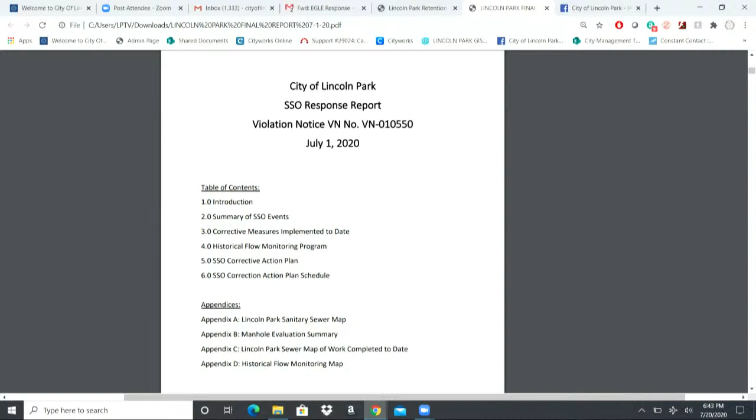Going through the report quickly, there are 6 components to the table of contents: an introduction providing an overview of historic work done to date, a summary of SSO (Sanitary Sewer Overflow) events, identification of physical corrective measures done to date, a historical flow monitoring program, an SSO corrective action plan, and an SSO corrective action plan schedule. The report is fairly detailed and technical.

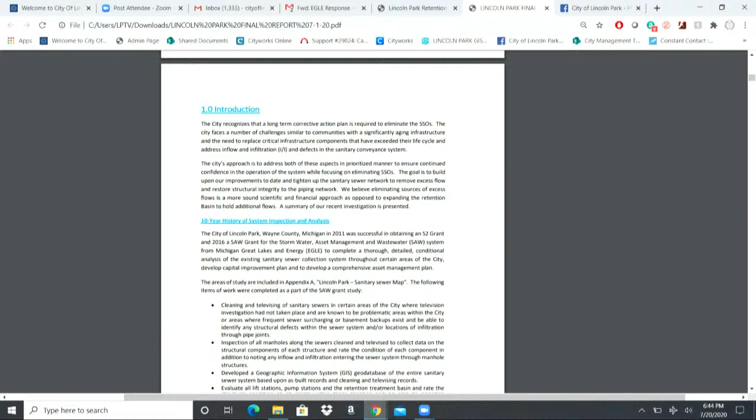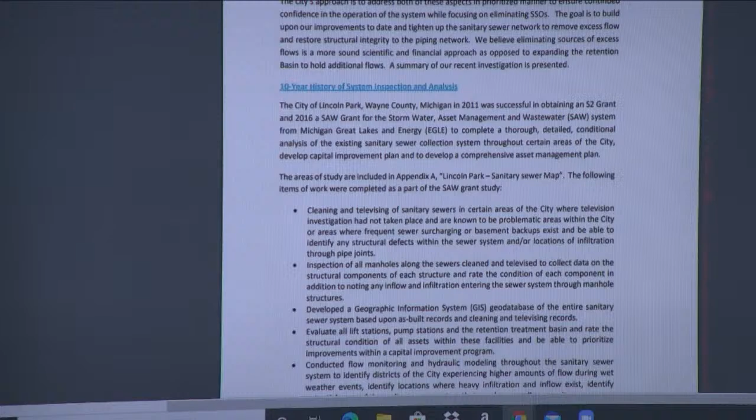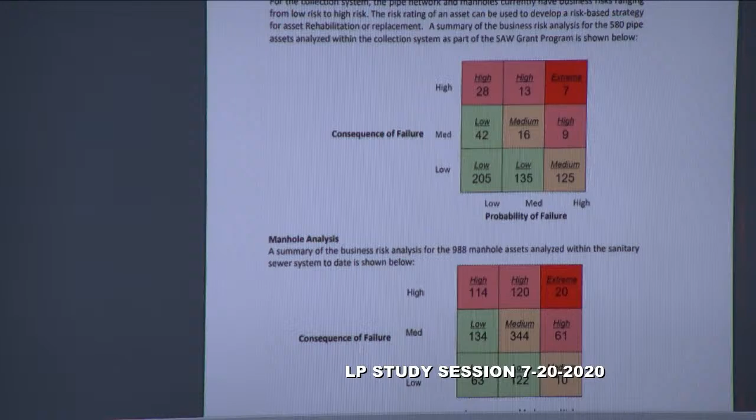The very first introduction is just an overview. One thing I'd like to point out is on page 4 of the report, where we did an assessment of the criticality of our assets. That means looking at the probability of failure score multiplied by the consequence of failure, so you can look at all of your assets present.

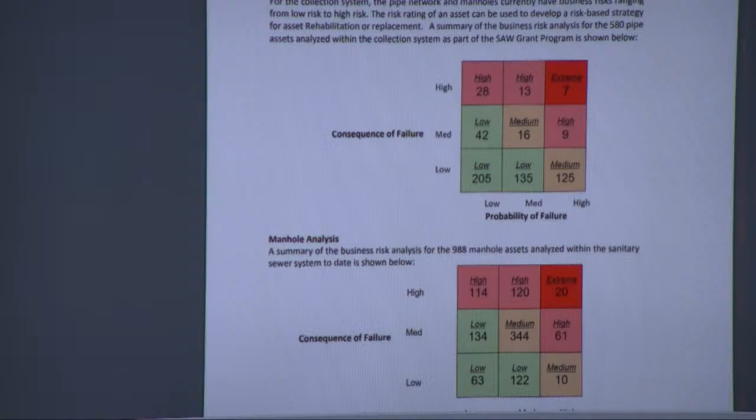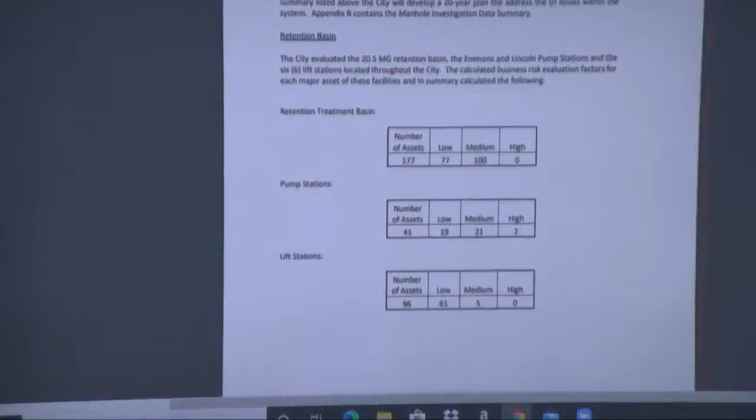An asset is something like the Emmons pump station, the retention basin, or the Lincoln pump station, and similar things. On page 5, you can see the number of assets within the retention basins - 177 were evaluated: 77 at low, 100 at medium, and 0 at high. That demonstrates all the work we've done.

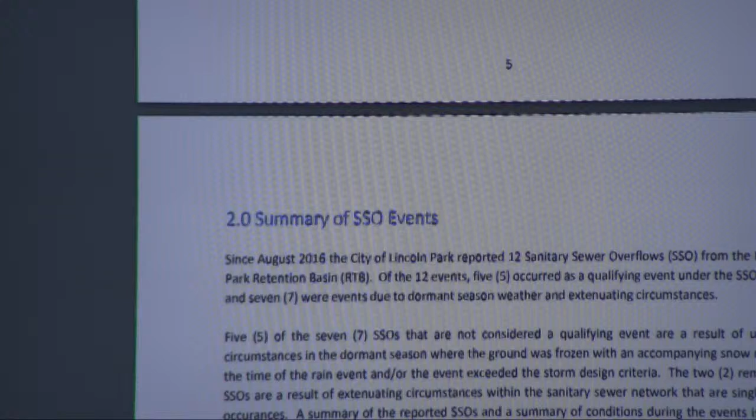All the detail for that information is within our SAW grant submittal, which we've already submitted to the agency. That provides an overview showing we have a very good idea of our needs. I'll go through this in the corrective action plan and circle back to what assets have to be addressed within the first phase, 0 to 5 years from now.

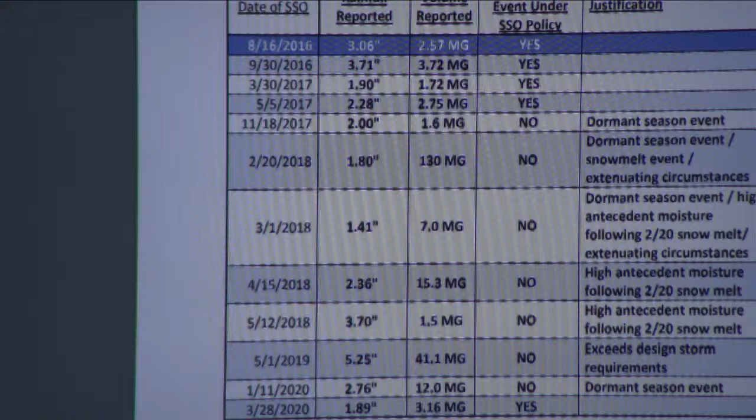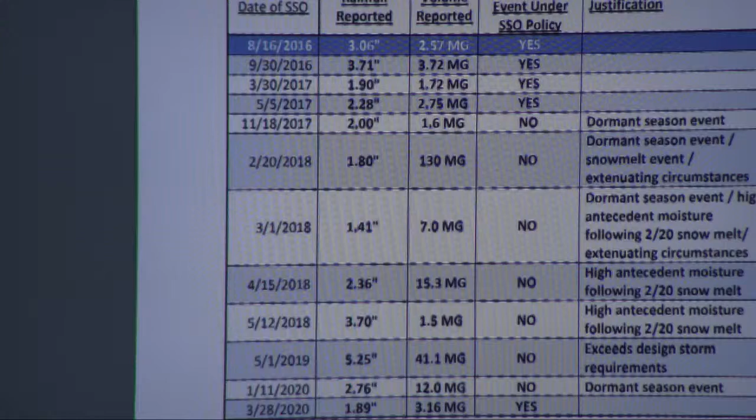The second portion of the report is a summary of the SSO events. We identified 7 SSO events that we don't feel qualify as a true SSO under the state agency's mandate - those could happen during a snow melt, off-season from the summer events, and things like that. Whether the agency will agree with us, I don't know, but we mentioned it in our conference call with them prior to submitting the report, and they realized there is some justification to that.

I'll identify 2 substantial events we had. One was on February 20th, 2018, where 130 million gallons was discharged. There were extenuating circumstances - we had a sewer break under the Ecorse Creek, and the Ecorse Creek was essentially free flowing into our system, then going to the pump station and then to the retention basin. The retention basin holds 20 million gallons, which isn't a lot compared to the volume of the Ecorse Creek, to be candid. That's why our discharge was so large at 130 million gallons.

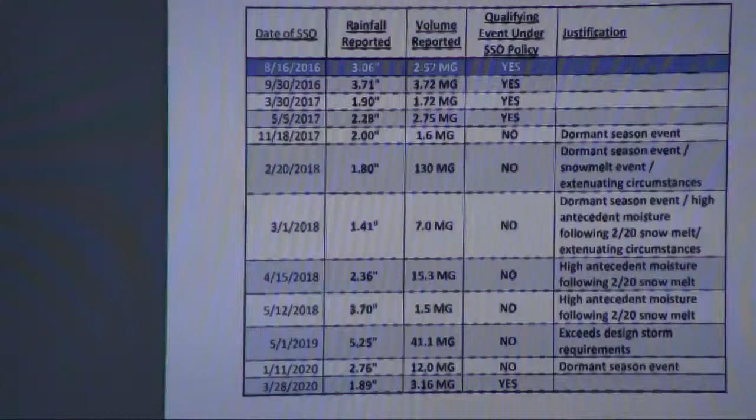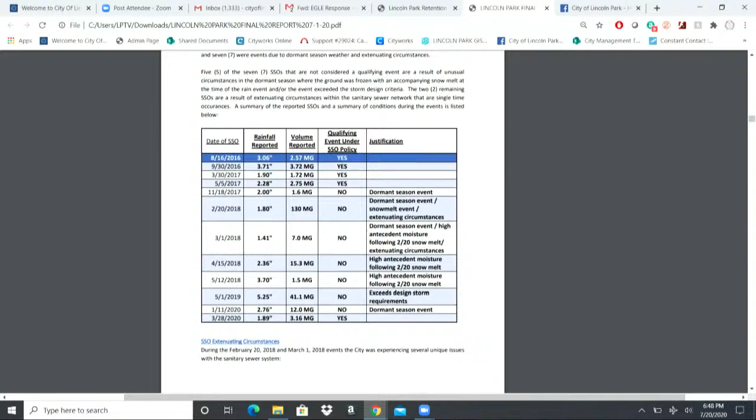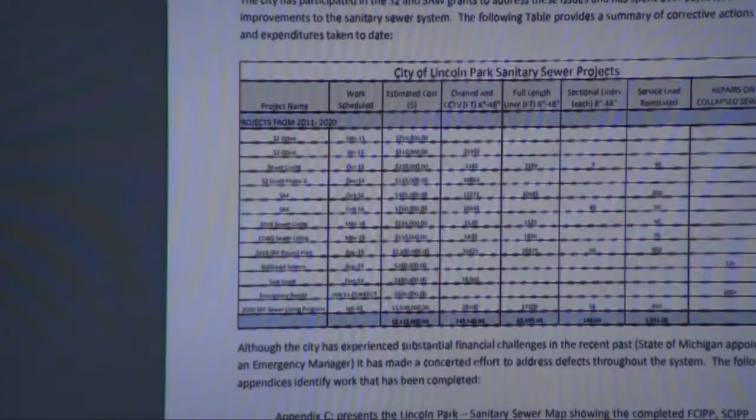The second extenuating circumstance was on 3/1/2018, when our discharge point was blocked. We were having high water with very late rain events, high water in our pump station. We realized something was wrong, and we couldn't unblock the outlet, the restrictor, until the flows had subsided. Those are 2 of the 7 events that demonstrate that every once in a while things can happen resulting in SSOs, and the agency, EGLE, is well aware of that.

The next thing we talk about is corrective actions implemented to date, on page 8. It identifies all the work that's been done since 2011. We've spent approximately $8.1 million on there.

We've cleaned and televised approximately 250,000 feet of our sanitary sewer system. Full-length liners, we've done approximately 60,000 feet, and sectional liners, approximately 188.

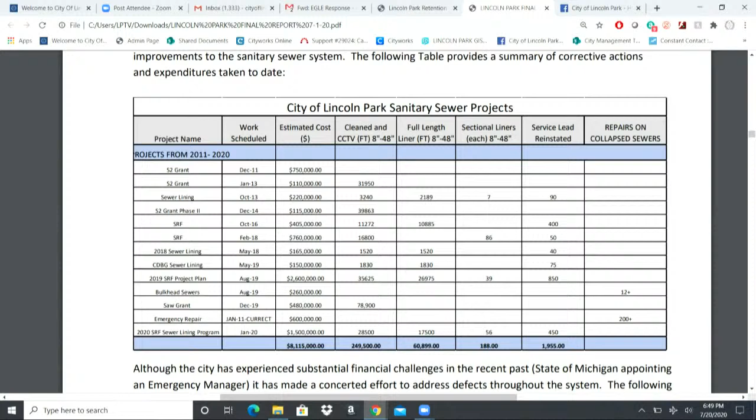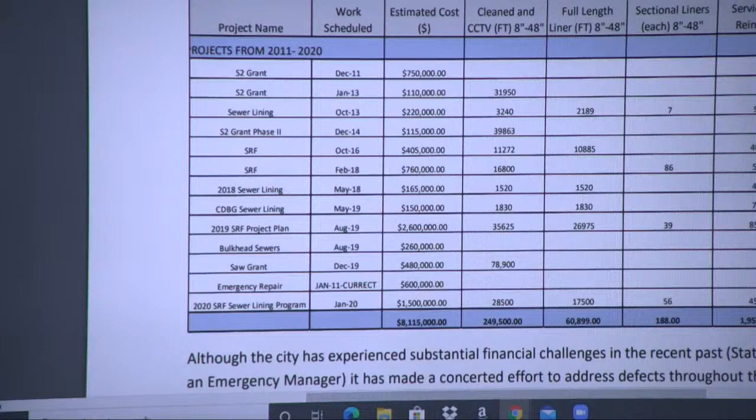You can see the difference between the full-length liner and the sectional liner. Lots of times, because of the age of our system, we're having to do full-length liners as opposed to sectional liners. Sectional liners are pinpoint areas that can be addressed through non-intrusive means, but our system is at an age where we have a lot of structural concerns that require the full-length liner.

You can see that we have certainly made quite an effort as a community to not only look at the problems facing the sanitary sewer system, but we've addressed them too. And I think EGLE is well aware of that.

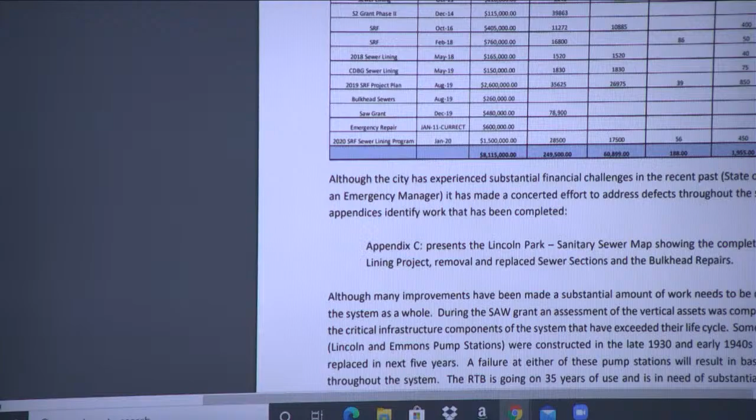I think the fact that they have not issued this letter earlier is a testimony to that, since they go back from 2016 to 2020. So they've been a good partner of ours in this approach, hand in hand on things we've presented to them on how we're going to address things. Because we've been very diligent and very proactive, they have kind of taken a soft approach to it and issued the letter when they really had no other alternative.

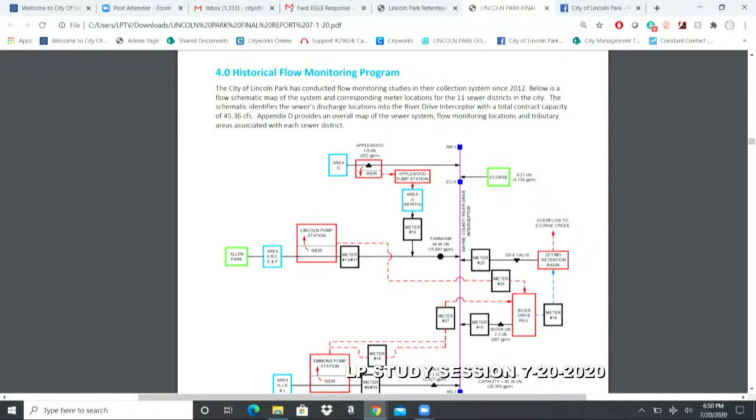But next is the historical flow monitoring program, on page 9 of the report, and that provides just a schematic overview of how the system really works. I know it's a bit confusing, but it basically shows that we have a number of discharge points.

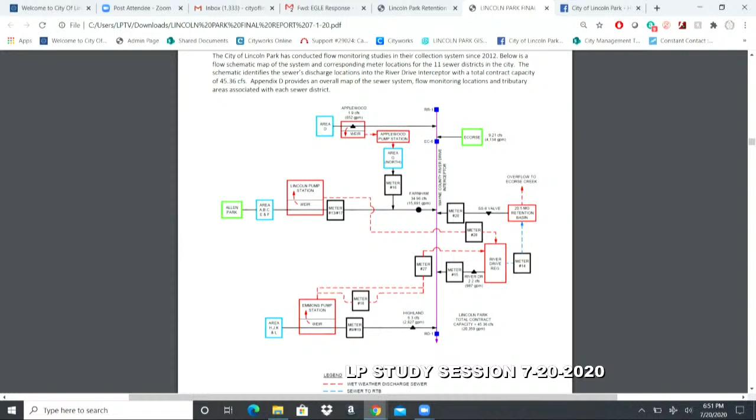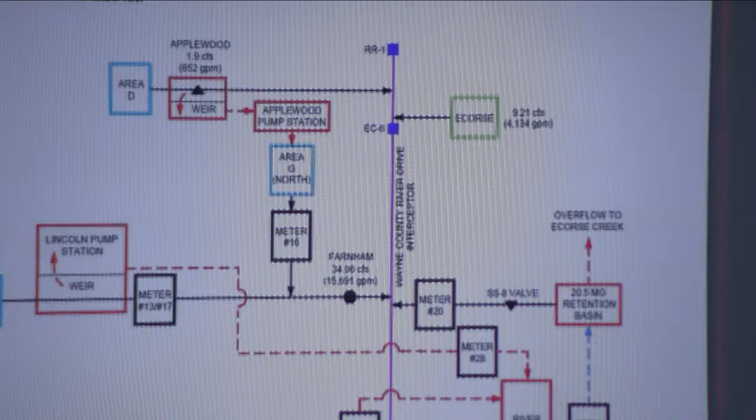Where the retention basin comes into play is with the Emmons pump station and the Lincoln pump station, and you can see we identify a weir. A weir is a flow wall, so what that is, water gets up to a certain point, and if it doesn't crest the wall, no water will go to the retention basin. Once it crests the wall, then it does go to the retention basin.

When it's stored in the retention basin, we have an outlet into the River Drive interceptor, and we're allowed to discharge our basin when the plant is able to take the flows.

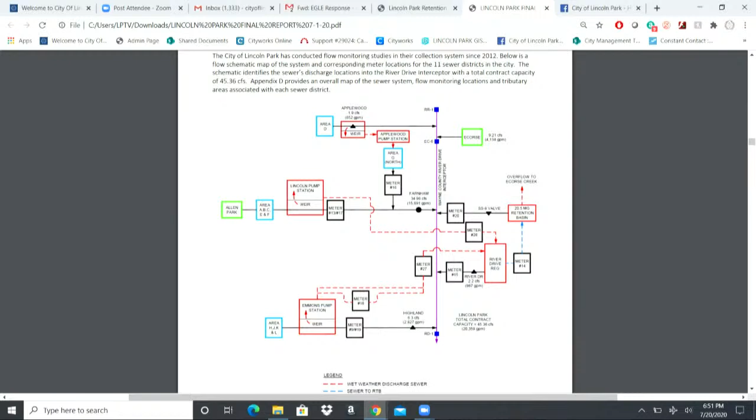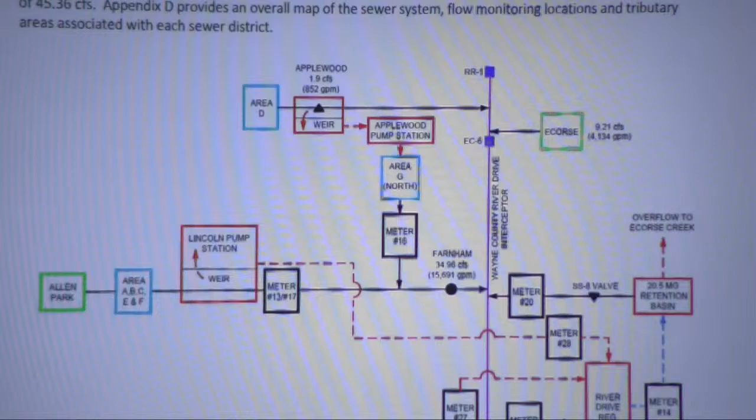So we can run into situations where we cannot discharge the basin and another rain event happens, and we end up with an SSO. We're storing from the first event, a second event happens, and we can't release our flows into the River Drive interceptor because the sanitary sewer system or the DUWA treatment facility can't accept them at that time. So there's a lot of things involved with the SSO.

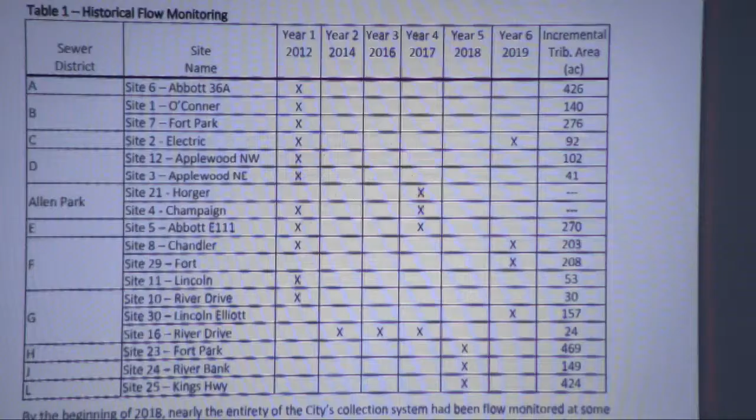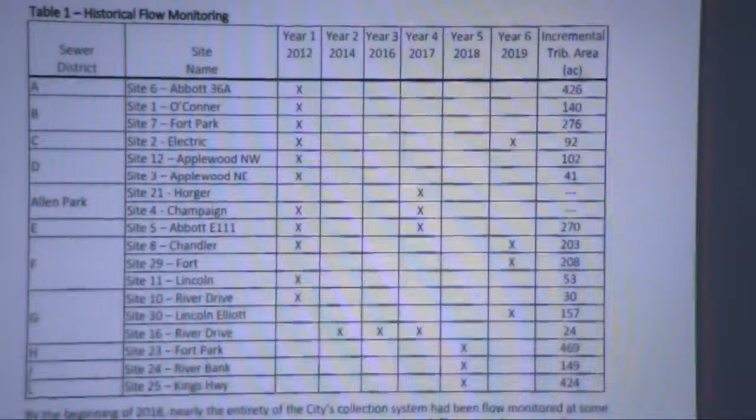The next page, page 10, provides the sewer districts within the community, and these are in the appendices that I can address with the public later, or we can go over a little bit later. We have sewer districts basically A through L, and we look at the ones we've monitored. A few of them we've monitored multiple times with flows just to see if we can figure out exactly where maybe some of these excess flows are coming from within the community.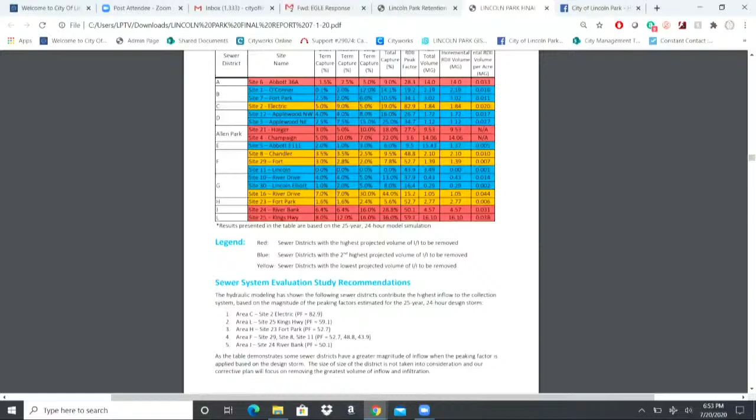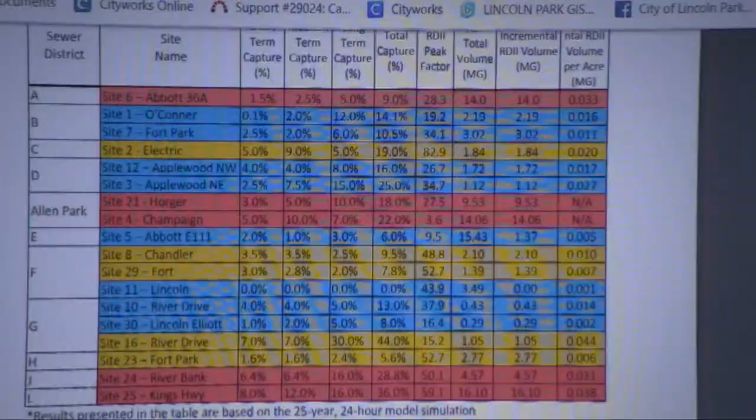Now, this is on page 11, an important page that I want to focus on. Based on the flow monitoring we've done since 2011 to 2020, we have broken all of the sewer districts into 3 categories: red, blue, and yellow. Red being districts that have the highest I&I that were present.

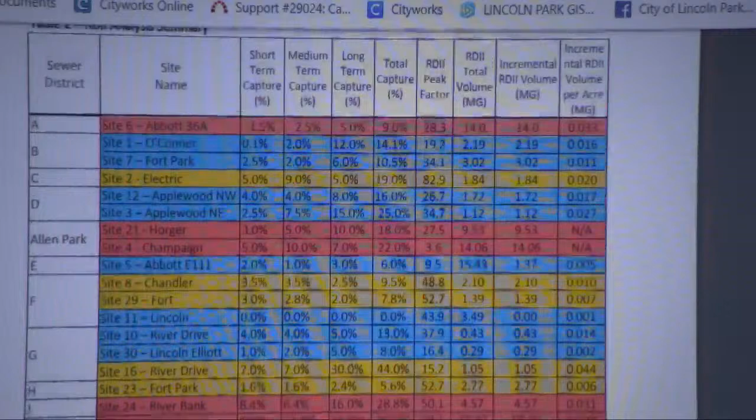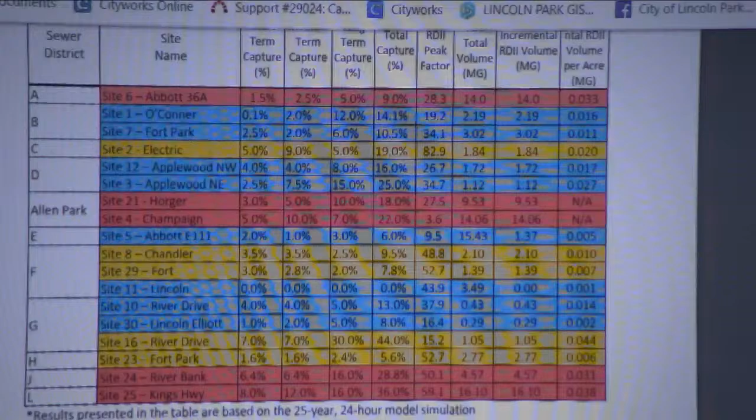I&I is, you also see it referred to as RDI&I, that's rainfall-derived inflow and infiltration. So the red ones, I identify a number of sewer districts, there are 5 sewer districts that are red. Within those, there are a number of sites where we feel that we can remove the most of our I&I.

And then blue is a medium priority, and yellow is a lower priority.

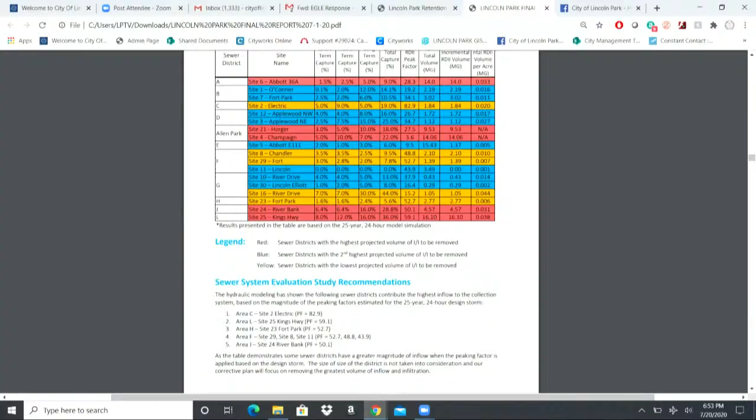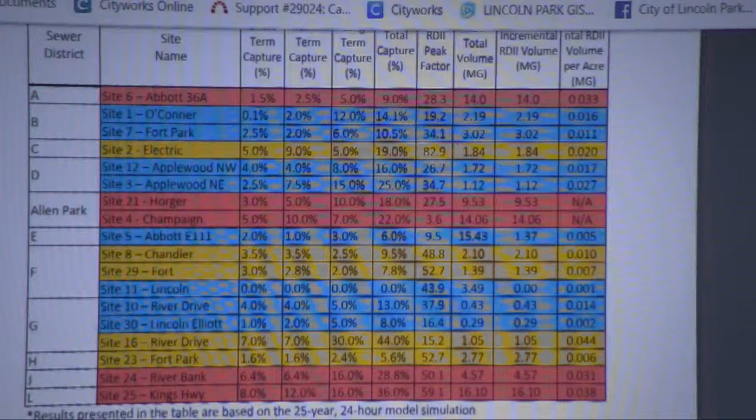I do want to identify that when we talk about I&I, it's inflow and infiltration. It's often considered about 50% public and 50% private. What I mean by that is private is inflow and infiltration coming from footing drains, from people's homes, and things along those sources. So what we're proposing to tackle with the agency is the public I&I, the leaks within our own system and things along those lines, and they're on board with that.

We've identified on page 12, within each district or within each category, red, yellow, and blue, how much I&I is being present in each.

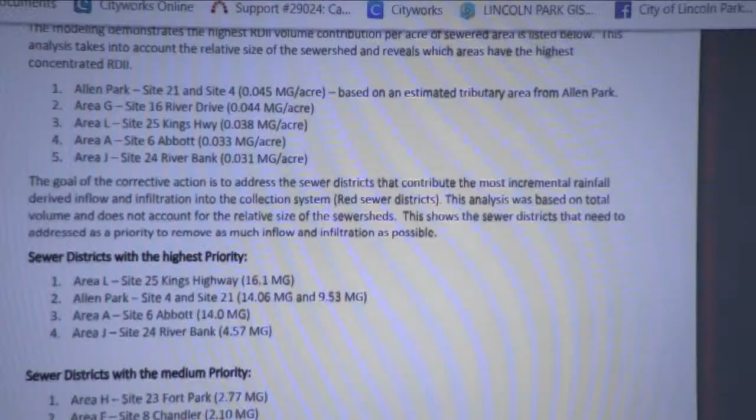So if you look at page 12, it says Area L, Site 25, Kings Highway. There's 16.1 million gallons of I&I through there. We are looking, half of that is public and half is private. So what we would be looking to tackle would be 8.05 within the public category.

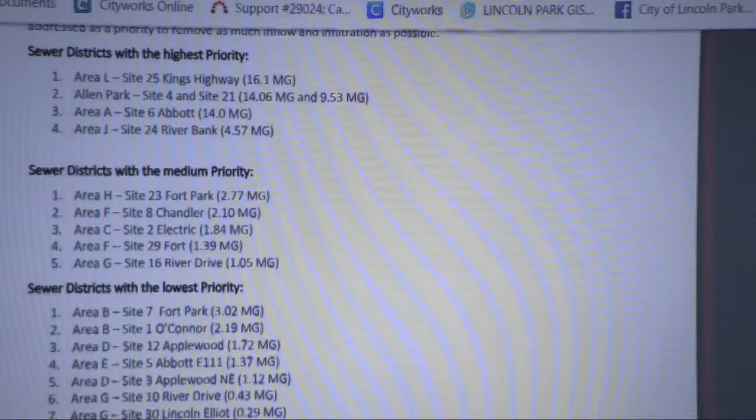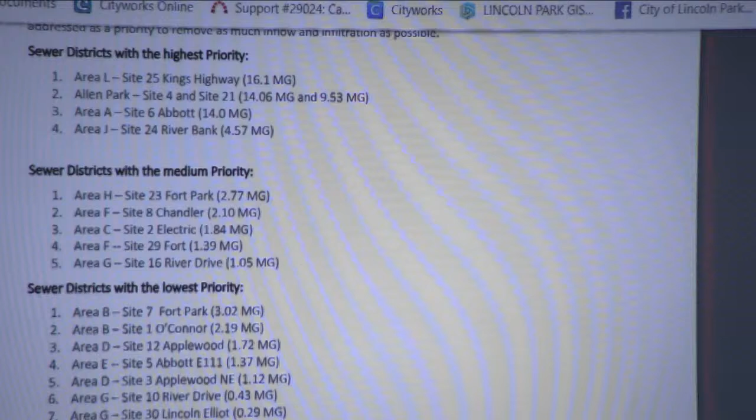If you look at the very last sentence, it says the goal will be to eliminate 20 to 35% of the inflow and infiltration of the public system. We've identified that range to give us some leeway with the agency. They might come back and say they want it between 30 and 35%, not 20 and 35%. But it's based upon the findings we find in the field.

So 5 is the corrective action plan. We talk about a number of improvements specific to different pumps within Emmons, within Lincoln Pump Station, and our other pump stations. We talk about generator replacement, station renovations. The Lincoln and Emmons pump stations were constructed in, I believe, 38 and 42, so they've exceeded their life cycle. Those are critical infrastructure components we need to address within the next 3 to 5 years to prevent a catastrophic condition within our system.

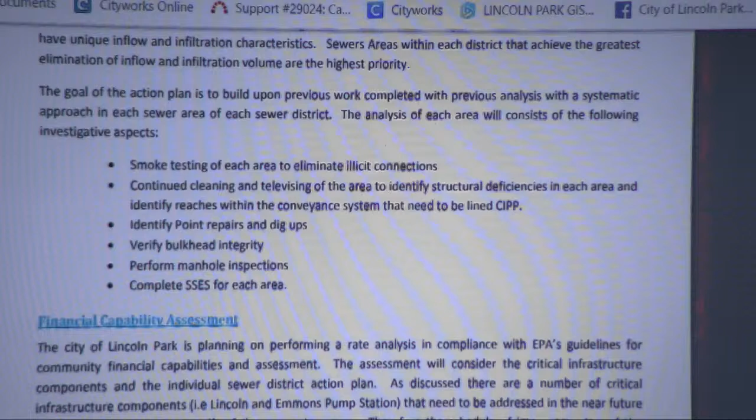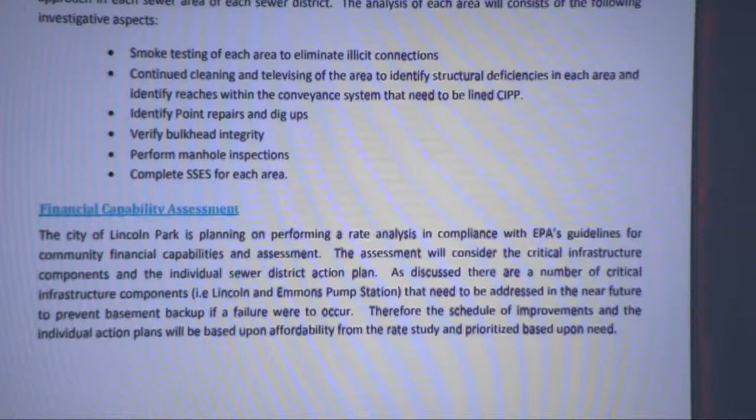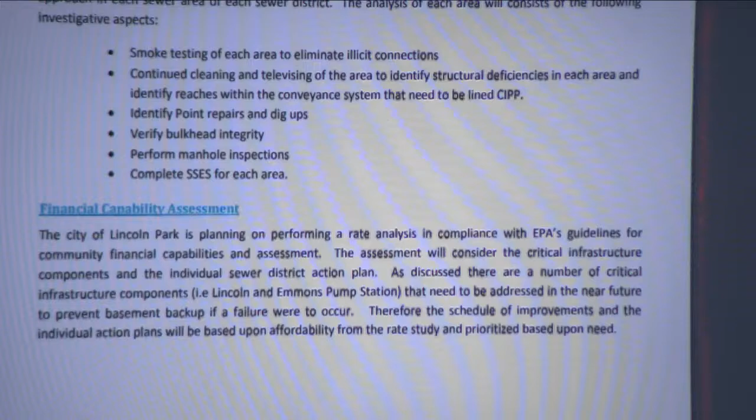On page 16, I want to identify the very last comment, which is very important: the financial capability assessment. As Mr. Kazoo mentioned, we're going to do a rate study based upon the EPA's guidelines for community financial capability assessments. We've put together an overall capital improvement program for 20 years for the collection system and assets, pump stations, retention basins. We've identified what type of expenditures we're looking to do in a perfect world, but that table will be modified based on our ability to afford it, which may extend that capital improvement plan out longer than 20 years.

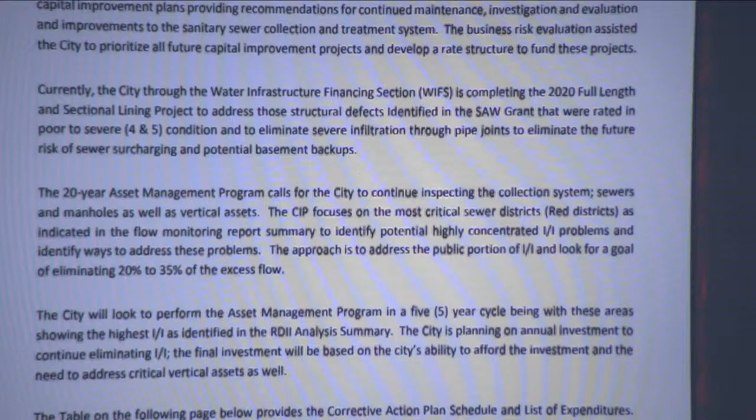6 is the corrective action plan schedule. That's just an introduction showing that we are looking to perform the asset management plan in 5-year cycles, essentially. So we go from 0 to 5 years, 5 or 6 to 10, 11 to 15, and 16 to 20. Our annual investment to eliminating the I&I will be based on the city's ability to afford the investment based upon our rate study.

Page 18 really brings out exactly what the improvements are, and I'll go through that. But I want to mention that in presenting this to the DEQ, they understand that we have needs, and our approach with the agency has been to tighten up our system rather than spend more money to build an extended basin. The option could be, well, just make the basin bigger—instead of 20 million, make it 30 million gallons, and then you won't have any SSOs. But we'd be doing ourselves a real disservice, because we would still need to address the structural deficiencies within the system, and the agency's in agreement with our approach.

So that's some of the reason for the phone call we had prior to our submittal into the agency. I was very happy that they were on board with that type of approach, because otherwise that creates a lot of problems.

Another thing I'd like the council to know is that EGLE understands the complexity of this system. This is really one of the more complex systems around, because it was a combined system originally, then it was separated out, and we have a number of different bulkheads. A bulkhead is where you block a pipe, where two pipes come together and you wall it up. Some of those are failing, which is resulting in the I&I. So we're confident that if we can get this capital improvement plan through the agency, we'll be able to tighten up our system to prevent SSOs. That's really our goal.

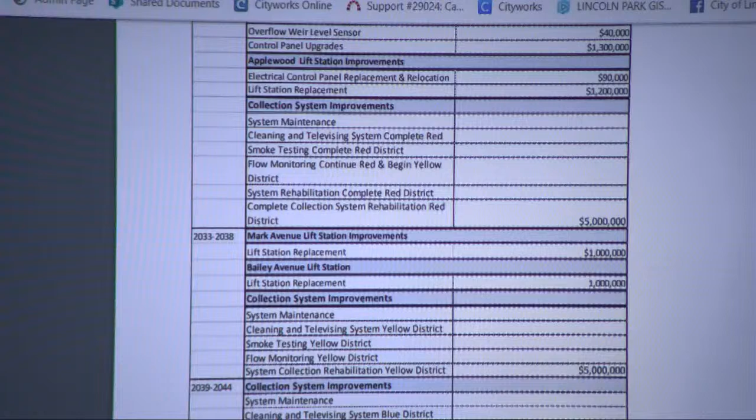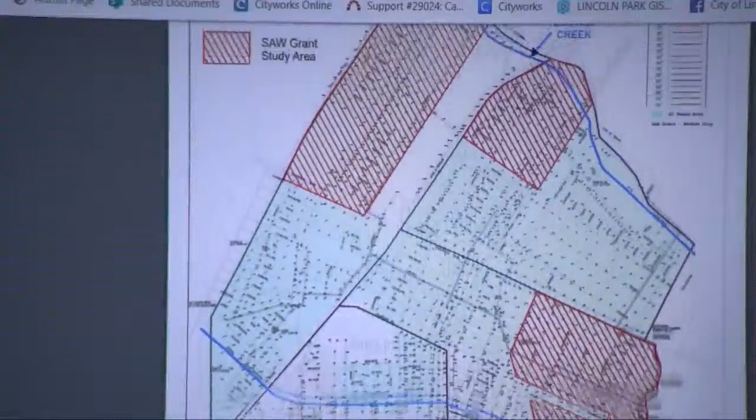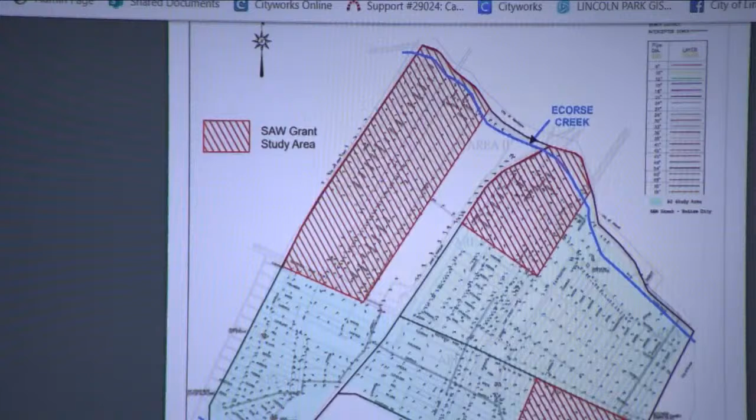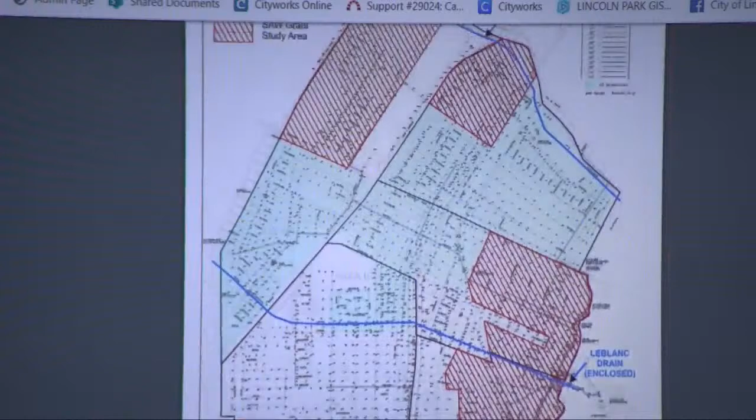And then there's a series of exhibits. Exhibit A identifies exactly the two areas done with the S2 grant and the SAW grant. You can see the S2 grant focused only on the sanitary sewer. The SAW grant allowed us to focus on the storm along with the sanitary, so we were able to get a little bit more in-depth information from that than we were with the S2 specifically. But you can see we have done about two-thirds of the city, which have been under study really since 2011.

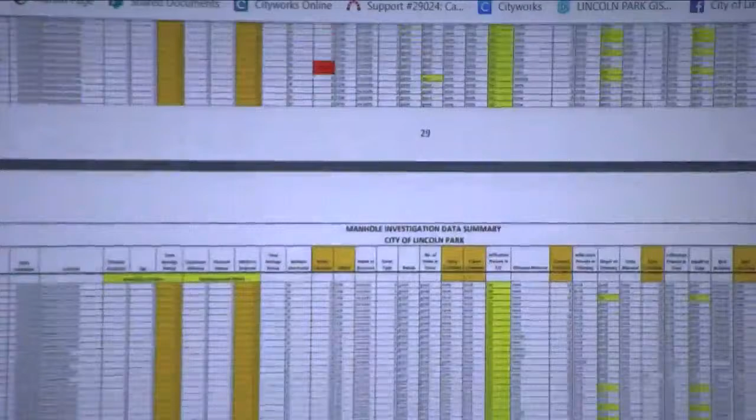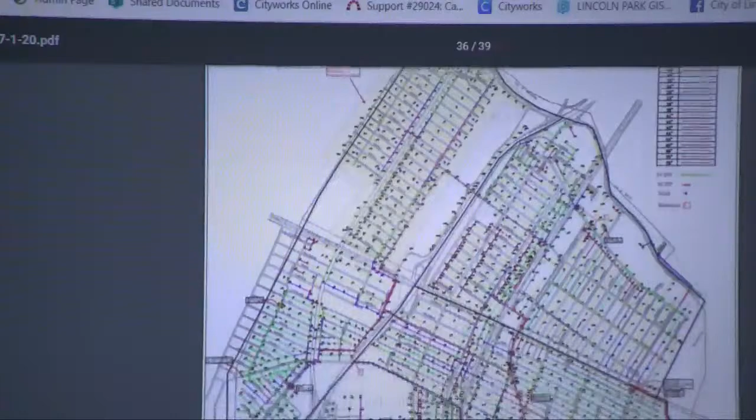And then we have the manhole inspection data. That's a lot of detailed tables that are really presented for the agency's review only, just for completeness. We wanted to demonstrate that we have been very proactive in our approach to this. And then we provide a series of overall maps that show the different areas we have within the sanitary sewer system, different size piping through there. And then the last graph is a color-coded graph that demonstrates the districts, the sanitary sewer districts within that approach.

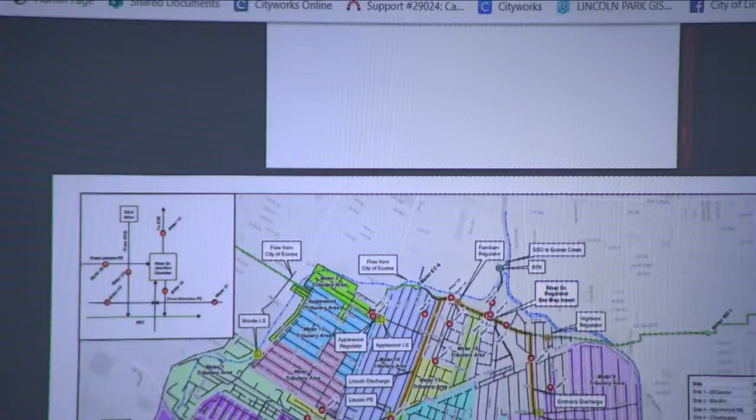So the state is looking for a 20-year capital improvement plan. It identifies approximately $37 million for that, and we're looking to spend about $17 million on critical assets, and then about $20 million will be spent on the collection system itself through lining projects and things along those lines. They are looking for us to really have a good approach, break our areas out so that we can remove the problem areas as much as possible through there.

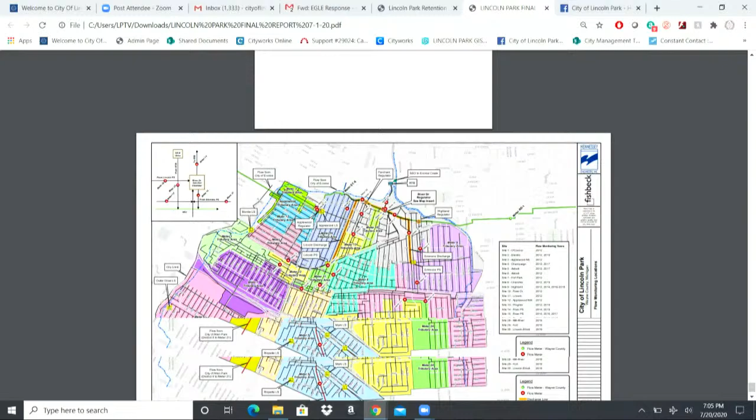But the one thing I did want the council to know is they are probably looking for us—they're going to respond in about 6 months, they think. There are a number of communities in a similar boat as us, but they're going to look for us to do maybe an administrative consent order for this that will identify what types of improvements will be done so that they have the ability to guarantee that we're putting our mouths where we say we are—we're doing what we're saying we're doing. But that comes much later on, after our accessibility and our affordability component through there.

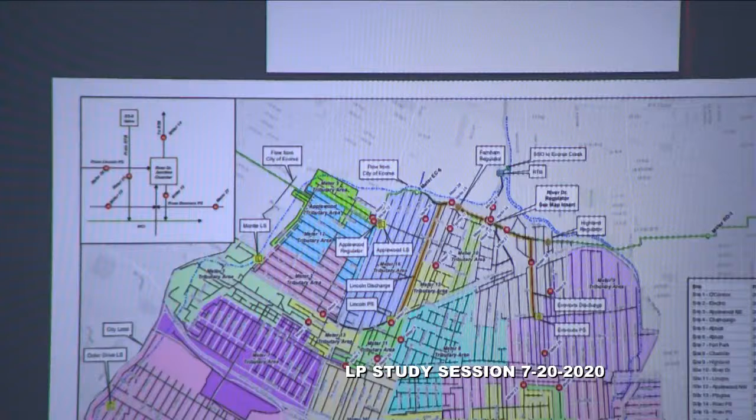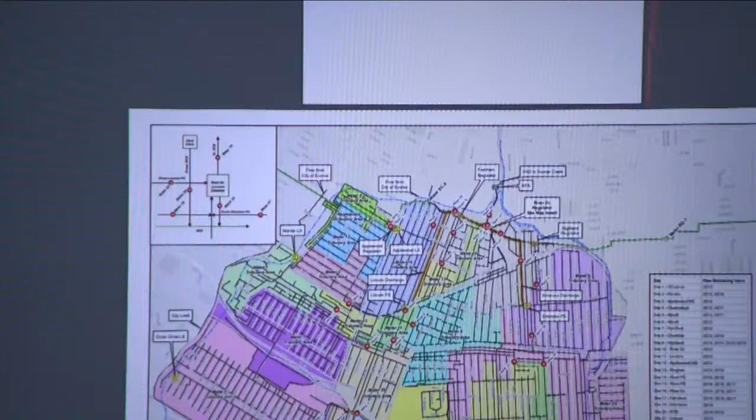And it's a fairly typical thing. The advantage to that, though, is it does provide us a little bit of coverage that we are working, and the state has accepted our plan, and it does help provide some risk assessment mitigation to us with basement flooding in that regard. I know that was a lot of information, so I'm here to answer any questions, or turn it back over to James.

Okay, James, you want to comment before I open it up to council? If I may. Let me check with Mr. Kazan first. Okay, if anyone has anything to add, I'm James—sorry, I just want to make sure I hit all of his points.

Okay, Council President, go ahead. I just—when he's talking about this administrative consent order, so in other words, this is a pledge that we're saying we will do it, we have to do it. Then my question is, will we be required to float bonds? Will we be required to ask the Treasurer if we can get some money? How in the world are we going to finance it? Does it all have to be in this consent order, all of these various amounts and pledges—whatever, is it all outlined and ironclad?

It's a living document, to be honest. It's a consent order that's going to be in place for 20 years, and there are look-back periods during it with EGLE, so that if we're doing things and they're in agreement with our approach and our ability to afford improvements, then the consent order can be modified with both parties in agreement.